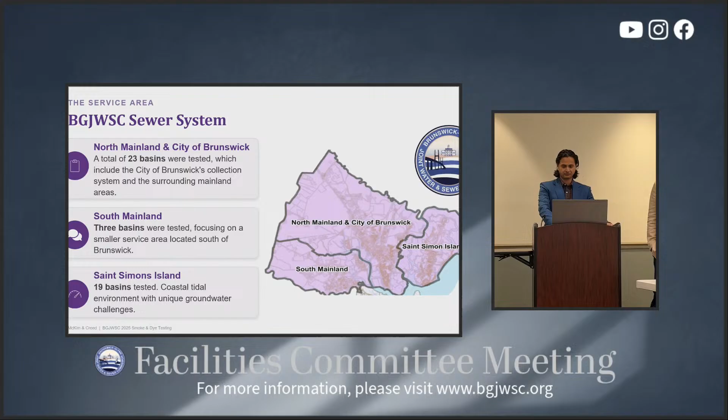So why do this project? What's the purpose? What do we want to get out of smoke and dye testing and testing your sewer infrastructure? The first one is any excess rainwater or groundwater that enters into your sewer system is extra cost that you don't get back. The clean water entering the system takes away from the sewer system's capacity, so there'll be increased cost on y'all, as well as the treatment cost, which you won't get back because you won't be able to charge it to customers.

Higher operating costs as well. Utilities like y'all have to transport and treat water that ideally never should be there, so there's an operational cost of that every year on the budget. Overflow risk: we size our sewer based on certain calculations, design flows and assumptions. When excess flows enter, it's something you typically don't account for, so you can increase the chances of overflow.

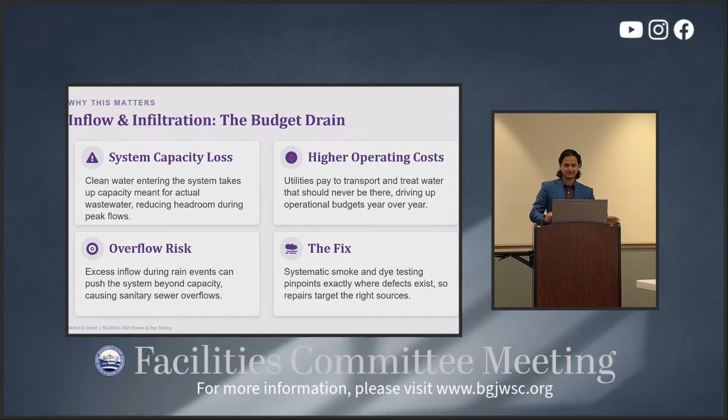So what's the fix? I want to make sure I say smoke testing and dye testing does not solve all of your issues, but it does help you identify larger chunks, because you can see visually through smoke and dye testing what areas you may need to work on. So it's not an end-all be-all solution, but it's a very good first step.

So I'll talk about the numbers. As I said, very impressive, approximately 1.1 million linear feet of sewer pipe tested across the 3 basins. We fielded a total of 65 call logs. We had a website that we made available to the public. They could reach out to any of us if they had any questions, and I want to give a shout out to Derek as well. He fielded most of the questions. We made sure when one of y'all's residents called us, it didn't go to an answering machine or a voicemail. We had a live person available the whole time.

We also logged their concerns, made notes of when those calls happened, and our recommended solutions as well. On the public side, we found approximately 948 defects. On the private side, about 174 defects. And we found 6 critical defects. The word critical sounds scary, but those were just things we flagged to Jason and the team to get resolved quickly, because they can affect your system. Some examples of the critical defects were missing manhole covers, collapsed structures, items like that. Again, it sounds worse than it is, but it conveys the imperative for y'all to go out there and fix it.

So after the initial round of dye testing, we also recommended a total of 51 dye recommendations, and that includes both dye tracing, on smaller segments of pipe, and dye floods over a larger region. We replaced and removed 38 clean-out covers. We had a question yesterday, people were impressed that number was pretty low, and that's because y'all had already done this a few years ago, so the items found then were already fixed. Certain municipalities said they were very surprised at how low that number was. So kudos to the operations team.

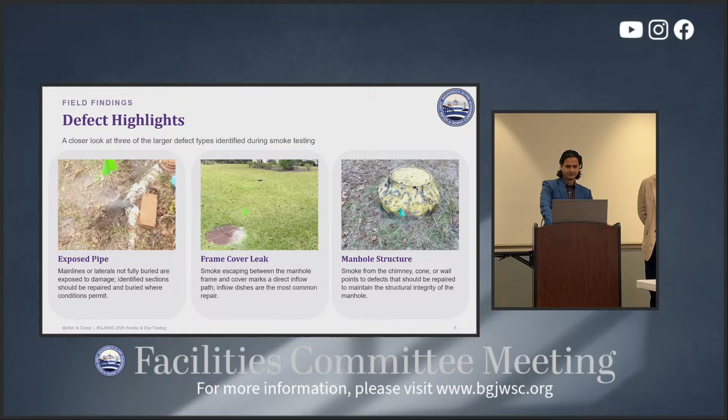And the third one is kind of damaged manhole structure, smoke from the chimney of the manhole cone or wall points that defects are present there. And it can also lead to structural integrity issues of the manhole. So we'll spend some time here on what went well. The field coordination, like I highlighted earlier, it was excellent from the start to the finish. Jason really helped schedule everything as the project manager, was communicative. I think we've probably spoken every day since this project has started about this project, and that was a huge success.

Eric White, very helpful with operations, always willing to help us out in the field, and also sending us files as well. And wanted to give a shout out to the rest of the team as well. Lucas, Byron, Dana, and the entire GIS team. Very, very responsive. Got us everything we needed almost immediately, and that led to the great success of this project. And the main other highlight I wanted to bring up is that we had a real live GIS dashboard that had everything about the project present, and Derek will speak a little bit on that.

So the centerpiece is the dashboard that we developed for this project. It allowed our team and your all's team to keep up with what was going on in the field in near real time. You can see at the top here, it has all the various statistics. A lot of that's what Yagesh has spoken on so far. Then in the map itself, you can see all of the points where we found defects or issues within the wastewater system. And on the left-hand side are the associated pictures with those individual points.

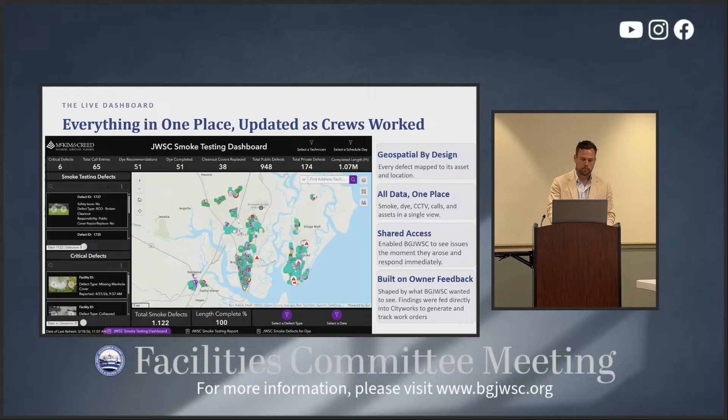This was developed in conjunction with you guys, so we had something that we came to the table with, and then we spent a lot of time working with the team here to enhance it and make it very useful for JWSC. So again, it was live. There was even one meeting that we were in, and at the beginning we notated how many feet were done, how many defects were found. 15, 20 minutes later, we hit refresh, and we were able to see that number increase. So it was pretty cool.

As Yager said earlier, we logged the resident calls there, so that if there were any questions, any concerns, you guys were easily able to access that and get all the information. The field-driven expansion, we added 7 additional areas, as Yager said, at the direction of you guys in areas that you wanted to have the smoke testing done based on what you were seeing out in the field. And then we were able to really make this a true turnkey program where everything was housed within this dashboard.

So some challenges that we faced: the single point of contact, or single point of coordination. Jason served as our point of contact for everything, which worked out wonderfully. But at times it added extra steps that Jason had to take versus us being able to reach out to operations directly, but we understand why that is the case. Our public outreach, we fielded a few more calls than what we were anticipating, but that's kind of to be expected for the residents in this area.

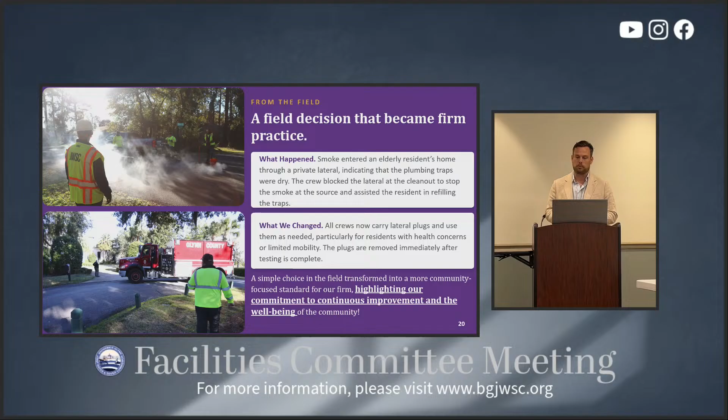So what we did is we acquired a lateral plug. We went to their clean out, removed their clean out cap, and put the plug in place for the duration of the test. So that ensured that the smoke would not come into the house. So we were able to give that resident reassurance, make them feel very comfortable with what was going on, and we communicated with them throughout this process. So as a firm moving forward, we're supplying one of these plugs on every one of our smoke testing crews so that when this does happen in the future, we're able to respond the same way. And with that, I will turn it back over to you, Yash.

So I have a few more slides before we close it out. Some more pictures of us out in the field. The first one was from October, from what I remember, when we were in full swing. I'm sure you all already know, but before we even went out and did any smoke testing, we had a very rigorous public engagement protocol we developed with JWSC. The first part of that was door hangers, and we had them both in Spanish and English. Went ahead, posted that, had frequently asked questions. Why are you doing this? Is the smoke bad for my pets? These typical questions you would expect from the residents.

So we did that initially, and on top of that, every week, so every Friday, every Monday, and also every day of the week, I would send out emails with maps to important stakeholders, so the fire department, the police department, GDOT, City of Brunswick, and also, of course, stakeholders from here. And I would point out the maps we were going to be working in case they got a call saying, hey, I have smoke here, so they could relate to the residents. No need to panic, it's this McKim & Creed crew doing smoke testing. So very rigorous protocol.

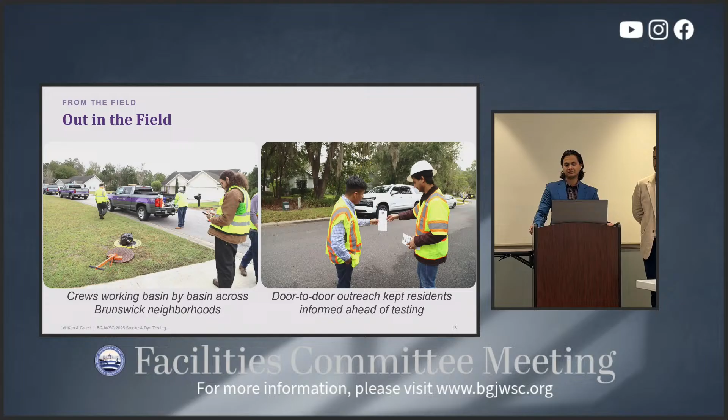We also worked with Byron on various social media posts as well, just to keep the residents aware. And I think that was another key success for us, and something we'll continue to do for future projects.

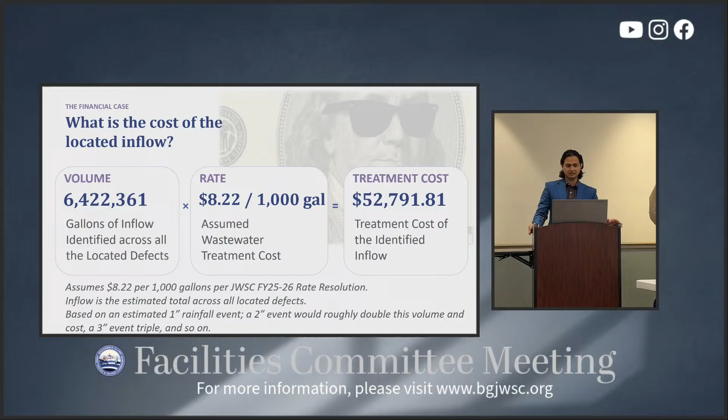So the last few slides we'll talk about the return on investment and what we found in terms of costs and money. So the total volume we identified was about 6.4 million gallons of inflow identified across all located defects. And we assumed a rate to treat wastewater of about $8.22 per 1,000 gallons of wastewater treated. And this is based on math of an estimated 1-inch rainfall. So a 2-inch rainfall would be double, 3-inch rainfall would be triple, and so on and so forth.

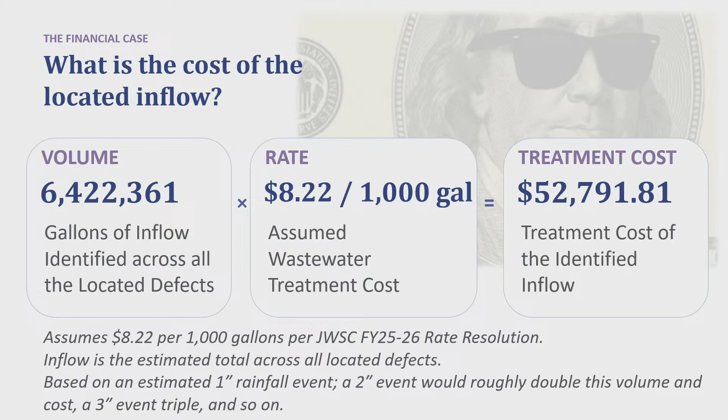So the average cost to treat an inch of rainfall event with inflow would be about $52,791 or so. So what does that lead to when you ultimately look at the math holistically? So the program cost for us was approximately $500,000. It was $496 and change, but for easy math, I rounded it up just a little bit.

So that yielded about 45 cents per linear foot of smoke testing, and Brunswick averages about 50 inches of rainfall. So if you look at that number and use the treatment cost I showed in the earlier slide, it's about $2.64 million per year. And for the 948 defects that we identified, we estimated a cost of about $2.37 million.

So the payback or return on investment, the key thing to focus on for this slide is if you have a goal of reducing your I&I by 70%, it would be a 2-year return on investment. So a good number for y'all. And this helps offset other costs as well. So the more I&I you don't have to treat, that will lead you to save money for other important repairs throughout your water and sewer infrastructure, new revenue as well.

And for a utility the size of JWSC, we recommend either a holistic thing like y'all did here every 3 to 5 years, or if there are targeted areas, do that and focus on smaller chunks as well.

So, last few slides, recommendations for the next go around. Shorter inspection cycle: 5-year helps you identify larger chunks like we did, but if you split up the system and look at it maybe every other year or something a little different than every 5 years, it would catch issues earlier. So something for y'all to think about. Since this is a coastal area, we also recommend doing manhole condition and salinity testing. That will help flag tidal intrusions in your system.

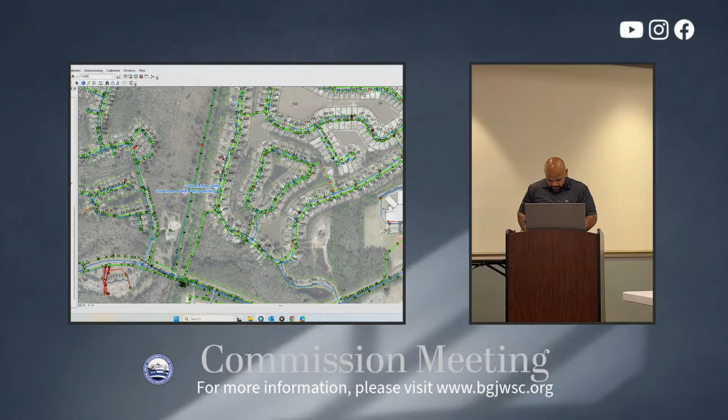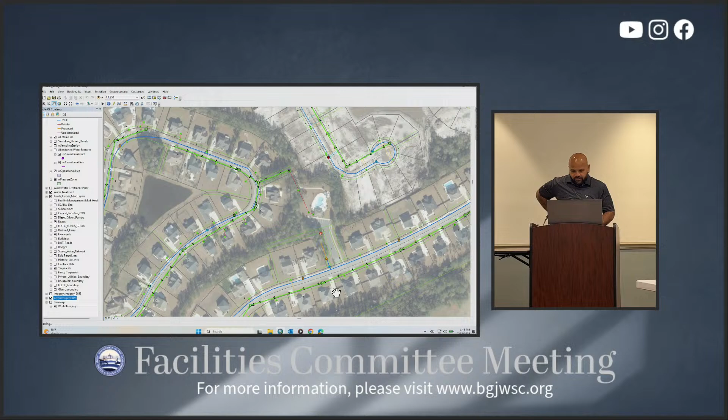Let's see. The first one is Carriage Gate, the amenity center. This is located off of Harry Driggers. The existing infrastructure within Carriage Gate is publicly owned and maintained by us. The scope of this one is just an 8-inch water main extension, approximately 140 feet, and a fire hydrant for dedication. The second one is Moss Point subdivision.

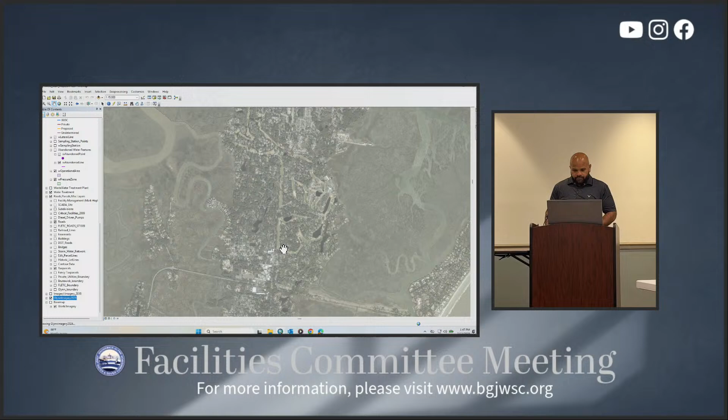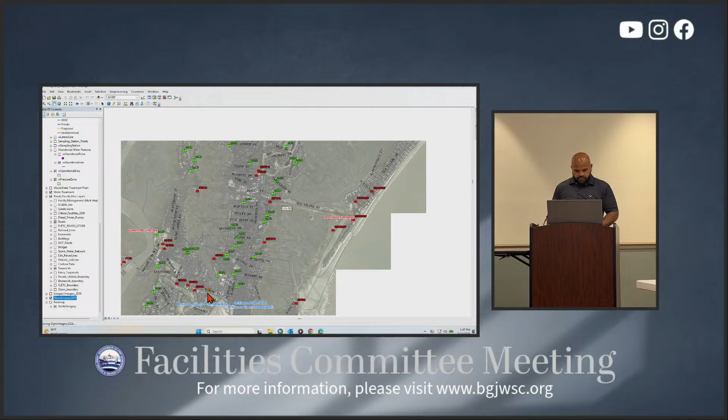The second one, Moss Point. This is an 11-lot subdivision. The water is being dedicated to joint water and sewer, approximately 385 linear feet. The sewer consists of a private gravity system with a private pump station. Just the force main, approximately 50 linear feet in the Demery Road right-of-way, will be dedicated to joint water and sewer. And if you recall, we changed it so future projects cannot do public water and private sewer, but this predated that change in the standards for submission.

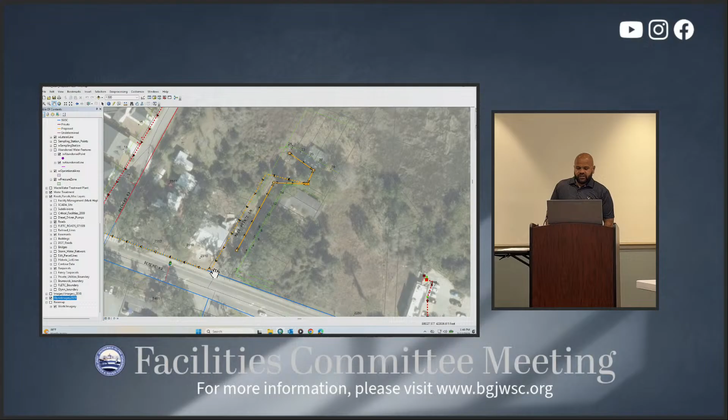Size of force main? 2-inch. It's connected to an existing 2-inch force main. How many houses is it serving? 11. What kind of pump station did they put in? I'm not sure. I'm sure it's a fairly small pump station. Is it a grinder or is it a? It's going to be maintained by the developer, but it is a community lift station. A small centrifugal. They still have to meet our standards. They have to meet our standards, yes, sir.

Typically, like I talked about when we changed the standards, what they are not able to meet for these private systems are the 50 by 50 lot, the SCADA, and the three-phase power. This one doesn't have any of those three, I'm almost guaranteed. But it's going to have two pumps. Yes, it's going to have 2 pumps, yes, sir. We don't maintain it. No, sir. Is this a gated community? I believe it will be. One thing, that first unit is in your face when you're riding down the road.

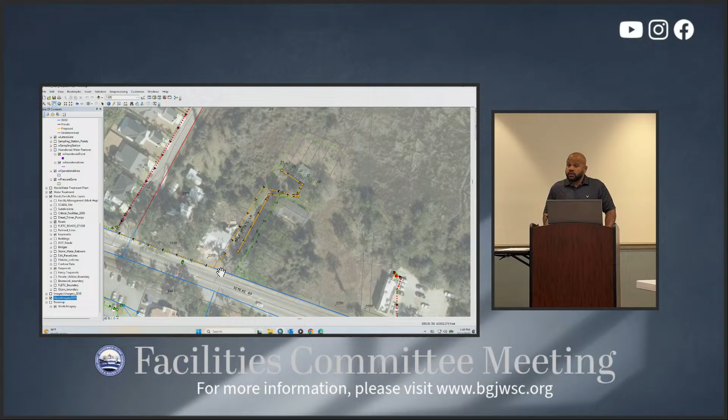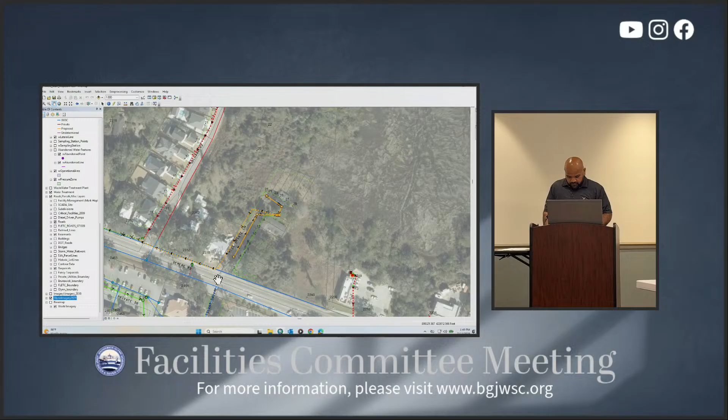The third one is Park at Village Creek. This is located off of South Harrington. This extension or dedication only serves 3 lots, but it is part of a larger extension of the original Park at Village Creek subdivision. It is publicly owned and maintained. This is off of South Harrington, which is Conservation Way, and like I said, infrastructure is maintained by us. And then Isadora Lane is the 3 lots just north of it.

This is Park at Village Creek you're talking about? Yes, sir. Let me find that in my drawings. Hang on, I'll get there. It might be called Isadora Lane on the actual drawings. Isadora Lane is just an extension to the existing Park at Village Creek. Right.

Once again, it's a 2-inch force main and 140 linear feet of 2-inch water main. We don't have a pump station, are these grinder lines? These are individual grinders. It couldn't be served with gravity? Part of it is, and then they ran out of fall, and there's a few homes on the backside that are just low pressure.

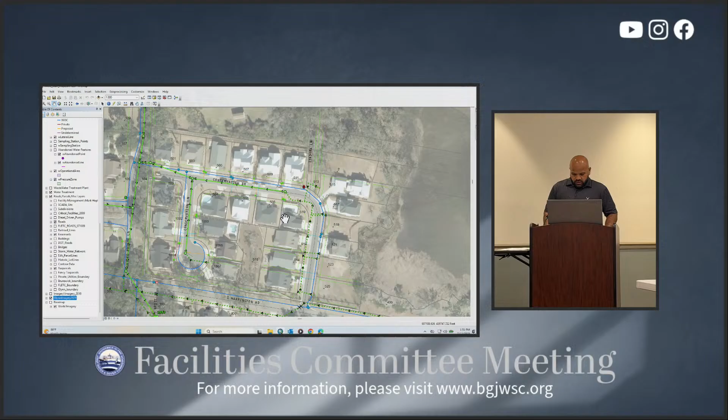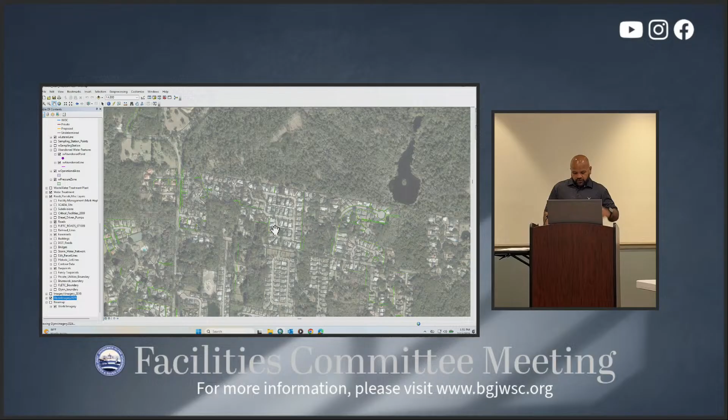Does this complete everything in West Point? I believe we've got one more phase they're going to develop. To now, all the construction till 5 is complete, but we haven't seen anything new. Did we have something about the pump station there? Did we upgrade that pump station, or did they upgrade it about a year ago or 2 years? It was an ownership of the pump station. We got that taken care of. Yeah, we got ownership of the pump station, and we did some improvements to the fencing up there that met with the overall look and feel of the community as a portion of that, and so we did all that, yes, sir.

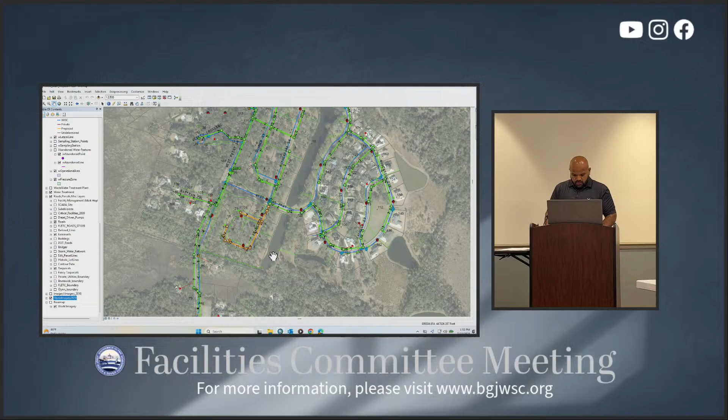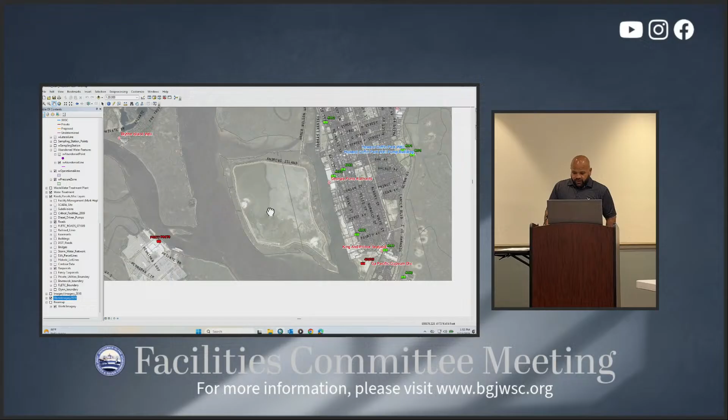Number 5 is an older project. It's a Southern Retreat RV Park. This is off of exit 29. We were waiting on some asset dedication forms from the applicant, which we received last month to close the loop on this project. It's approximately 475 feet of 6-inch water main that connects to an existing 4-inch meter that's out there. So that's pretty much to clean up the ownership and maintenance of that asset to the meter.

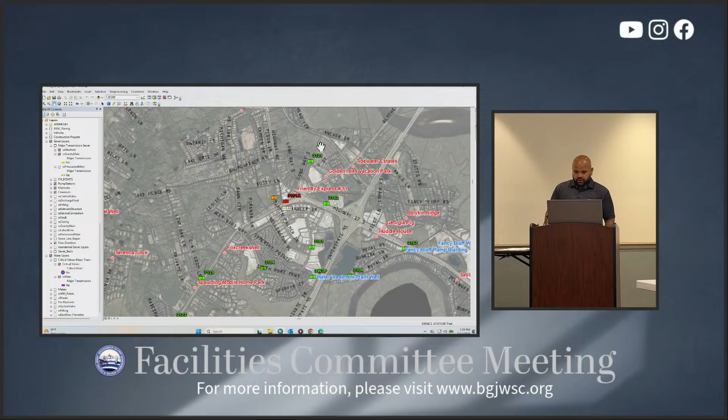And approximately 388 feet of gravity main that serves. These are RVs? Yes, sir. RVs, approximately 180. Each one's metered? No, sir. It's a master meter on a 4-inch. Just one master meter, and we're taking the water main to the meter and the sewer main once it leaves their property and goes across the GDOT ditch into the back of the pump station. Or county ditch. At one point we thought it was GDOT, but it's a county ditch.

But nevertheless, everything inside the property line is theirs. So what we're getting is the stuff outside their property line. Yes, sir. Which is about, what, 55 foot of 8-inch? It ain't a whole lot, no, sir. Yeah, pretty much just the one leg of sewer to the manhole, and then water's going down the right-of-way ditch to the meter that's located.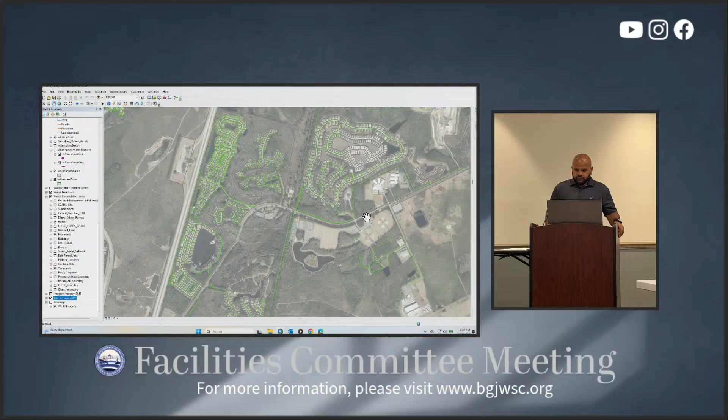Look, I do believe we're gonna inherit some stuff over time. There's too many of them, and the economy is too fragile. I will say that with the changes that we've made since we put them in place, the people that have been coming to us, they are following the new rules. They're moving forward. So glad we got that taken care of, maybe not for these projects, but for future projects.

Questions on this? Can I have a motion? Chairman, I move the Facilities Committee recommend to the full commission accept this infrastructure with associated easements as applicable. Second. Motion second, all in favor? Motion carries 3-0. Good report, Harry.

Next item, we'll move to the discussion section, the water production report. Mr. Burris. Yes, sir. So the month of June, average flow through the whole system produced 8.76 million, metered 8.12 million. That's 7.3% unaccounted for the month. Almost got to 31,200 AMI readings for the month, so we were above the 98.5% contracted value. So good to see that. We've been piloting some higher gain antennas that have been successful. So thankful for working with Neptune on these issues as we move forward.

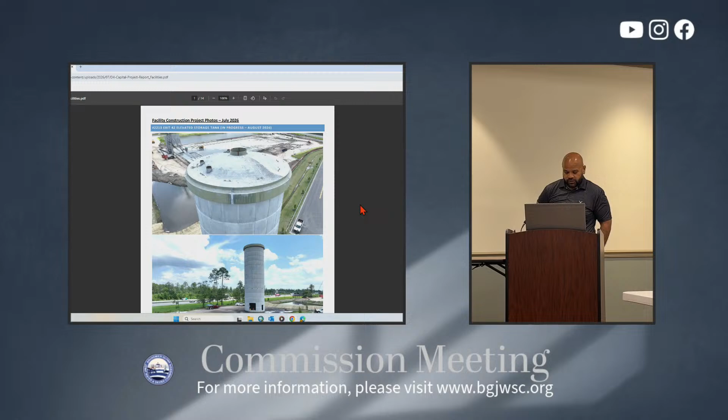In your package there'll be the construction project photos, with the first project being the Exit 42 elevated storage tank. As you can see in the pictures, we are actively working on the electrical and the shaft work within the tank itself. Site restoration and access to the site is next in line, with the making of the bowl as well. There's also, based on that first picture, a lot of construction going on in and around the project site. The second phase of the warehouse project has started, and we also have the I-95 force main project that'll come through this corridor.

Is all that water within our property lines? Yes. How do we get rid of that? If you look at the second picture, they're supposed to bring in a good bit of fill to where the door is going to be, and then reroute a ditch to the I-95 main ditch on the front and the back side of the property. So all of that water is going to be filled in. Yeah, we'll have a little swale on the front side of that picture, and then on the back side going towards the interstate ditch. So it looks like it's stuck in there and can't get out to the ditch alongside the interstate. Yes, sir. That's what's currently happening, but the final grading will handle that. We'll slope everything towards the I-95 ditch.

Third and fourth pictures, once again, it's just an overview, and it shows. You got a paved road into it now. Yes, sir. If you recall on this project, we rerouted the entrance to match with the new public right-of-way at the Amazon building so that we didn't have to put our own roadway in. Access road there, don't we? Yes, sir. That's the best access road we've got for an elevated storage tank.

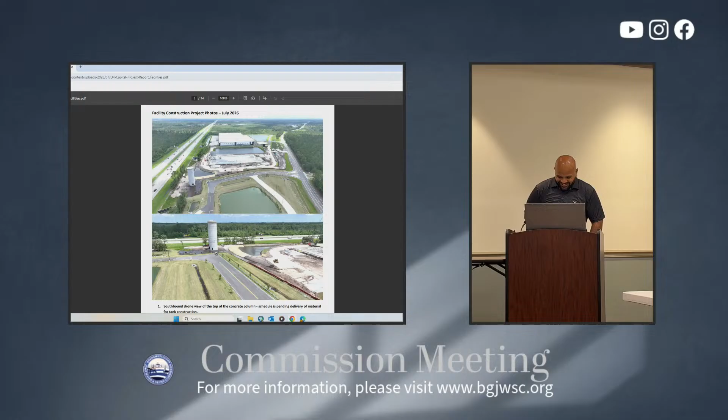That's good. The second project is SPLOST Exit 29, Division 1 water production facility. From the pictures there, the interior, the piping and connection to the existing main has been made, and they're working on setting the vaults for the ground storage tank, and the piping for that. That's the vault there that's being put in. Yes, so right next to... Right by the gate? No, by the gates where they're making the tie into the existing water system. The two vaults are located pretty much between the ground storage tank and the maintenance building.

Where's our well on the site? Back between the ground storage tank and the maintenance building. If you look on that top picture, the well is in between the ground storage tank and the maintenance building. There's a better picture of it on the next page.

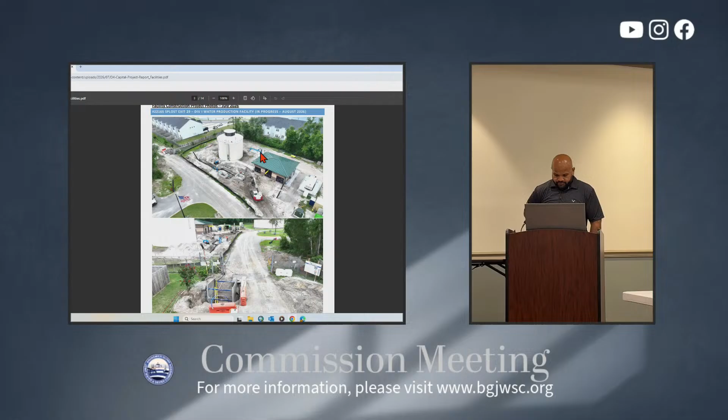How far is it from those apartments? The well? Well, 150 feet maybe? From the actual doors, from the backyards, 100 feet maybe? They're in the parking lot. Yeah, exactly. Okay. Electrical installation and installing of the pumps and all that's going on in the maintenance building as well. We're not operating that yet. No, sir.

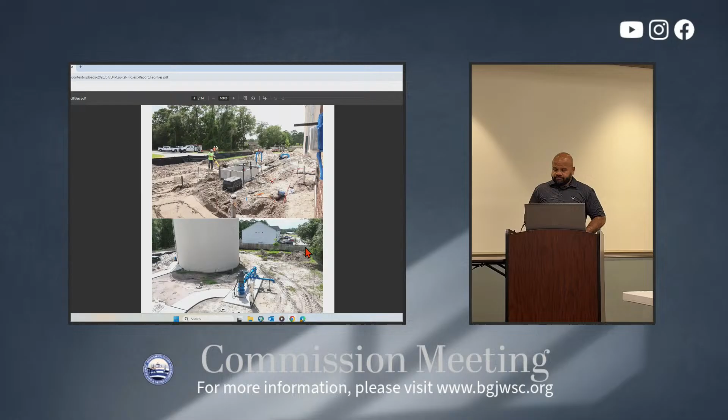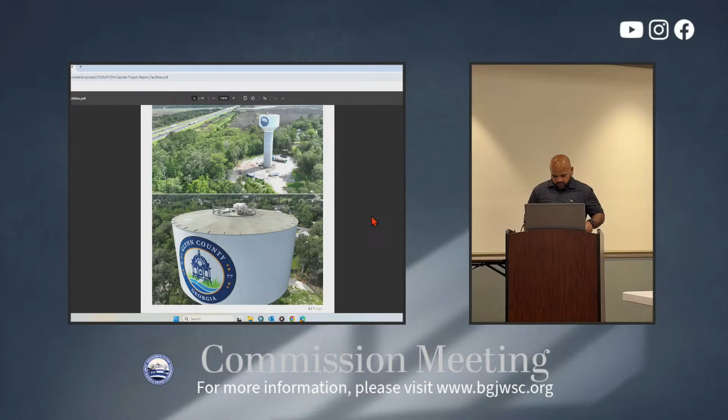Third project is the Division 2, which is the 500,000 gallon elevated storage tank just south of where the well and the maintenance building is. They're working on the interior of it, interior painting of the bowl, and site restoration, and also the access to the site. That says Glynn County on one side, and on the other side it's got our logo. Which says Glynn County, coming into town? Coming into town, yes, sir. From the south. I was going out. Yes, sir.

What's the slope on that roof? Anybody climbed up there yet? No one that is covered by joint water and sewer workers' compensation insurance has climbed up there yet. Thank you, attorney. Is our inspector going to climb up there? Our Thomas and Hutton's inspector will climb up there. Or Mr. Chapman will when he gets here. Pretty easy. Just go inside. Have you ever done that, Mike? Yes, sir. I climbed Cate Road many times.

The next project is a joint project between the city and JWSC, the Howard Coffin Park pipe relocation. As part of their storm drain project, we have incorporated some water main and sewer main relocations. The water main relocations are done in-house by Derek and Alvin's crews at Water Distribution. They've already made the crossing for the 12-inch water main and connected it to the existing. We are to build a 12-inch header just on site of the property to make that loop to abandon a few more crossings on that tidal ditch.

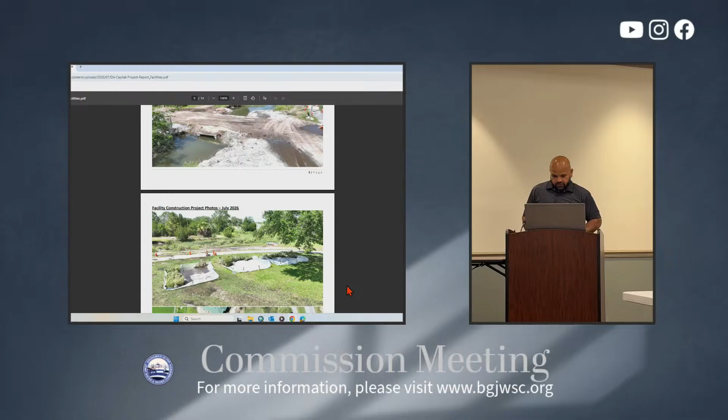For the sewer, there's a 6-inch force main that crosses that ditch, and we're looking for pricing to get that relocated. We're going to keep that road across the creek? Right there? Yes, sir. There before? Yes, sir. That aerial from our drone, that's a nice picture. Yes, sir. There's a total of 3 water crossings and 1 sewer crossing, and we're trying to eliminate all 3 and make 1 big crossing for the water.

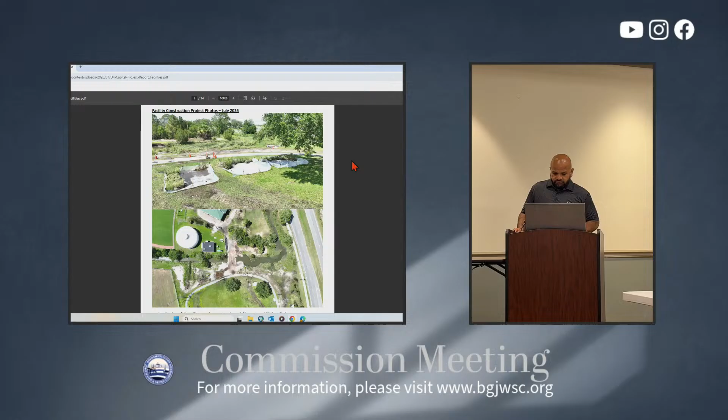The next project is the Academy Creek Clarifier Rehab Project. Yes, sir. So as we talked about, we recommended awarding the contract to BRW today. They've inspected the clarifiers, and so we're just going through submittal approval, and then we'll be waiting to get a defined ship date. So again, we'll take clarifier number 2 down. In that first picture, it's the one on the bottom left. That will be the first one that comes down, and then we'll do the one just above that, number 1, and then we'll move to number 3 in the back right, and then work our way down that side.

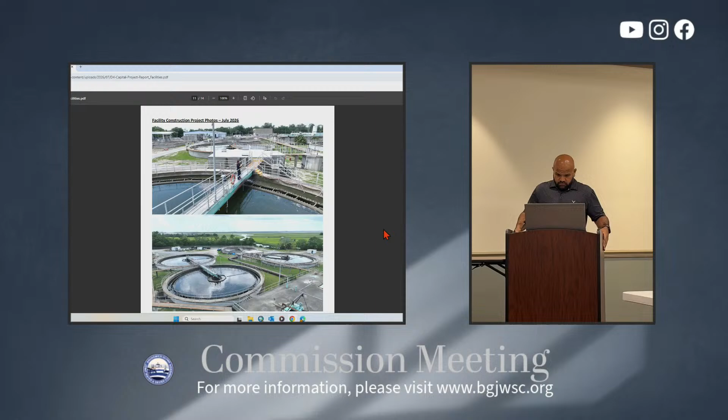So we'll be tearing all the internals out of number 2, recoating and doing all that, and then hopefully timing that exactly so when things show up, they can start installing. But looking forward to it. We're doing well at Academy, but we're operating on very narrow margins because the clarifiers are still challenging for us. So getting those clarifiers corrected will really give us more control over what's going on at the plant. But if you looked at pictures of Academy before and you look at the clarifiers now, the plant looks considerably better from a visual perspective than it did just 6 months ago.

We pulled all the stuff out of the aeration basins. Was there a lot of grit in there, or what was in there mostly? In the aeration basins, it was almost all grit. There were some rags, but it was almost all grit.

Yes, understood. Well, with the current grit system, what we've determined is when both grit pumps are trying to run, one of them is deadheading and causing it to lose prime. So Mr. Grantham's team has installed timers so they won't run at the same time, which has seemed to help keep them from losing prime. That's here, but what about at Dunbar?

Oh, yeah, at the other plant, certainly. Grit systems are, as you know, a difficult situation to size for first flush events after major rain events versus normal conditions, so certainly something we could take a look at. Yes, sir. Saw a presentation this week where a gentleman said his grit system works fine as long as it's not raining, and then he can't keep up.

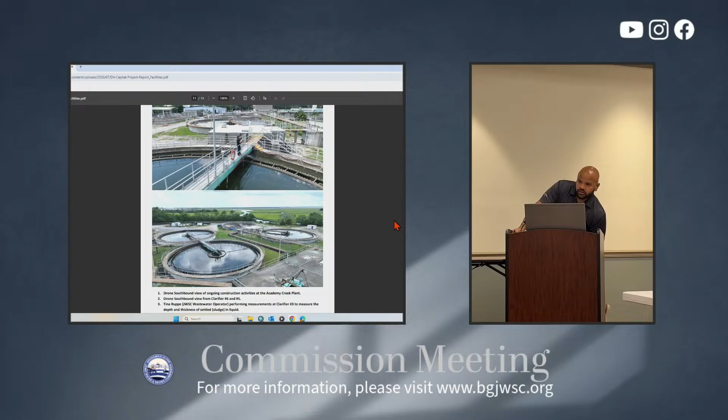A few of the projects that aren't on the list that we're working on: we're actively working with Glynn County on the Gateway Improvements Project, which will come up here shortly, and also the Sea Island Roundabout Project, which we'll have engineering design on. The water production SCADA and electrical improvements on St. Simons Island: contractors are in town this week performing grounding testing to confirm the grounding loops at each of the sites, and they'll be making recommendations for improvements on that.

We're getting closer to being able to bring a phase 2 contract on that project. Hopefully before Labor Day we'll get that. So maybe September's meeting before we get that to you, but we should be getting those numbers in the next month or so on what that final cost is going to be. And the kickoff meeting is scheduled for the 4119 and 3103 project on August the 5th, so moving along on that project as well.

A couple of in-house engineering design projects that we're close to wrapping up the engineering on. The SPLOST water and sewer extensions, the one on Whitlock Street: we got comments back from distribution to make a few adjustments, so we're finalizing those. We have a couple easements to get for that one. The sewer's pretty much designed. And then pump station 3114, the access road is the one that's holding us up a little bit, but we're moving forward with the design.

In the next meeting, Andrew, can you tell us how many people are tied on to the sewers that we put in? Sure, we can have those. I know the ARCO grant's around 35 that's been connected. Yeah, I think we passed 40. Oh, okay, past 40. Out of how many potential? 50 have signed up so far in ARCO for the grant program. We have the funding to do 94 of them, I believe. So we've had 40-something that have tied on thus far.